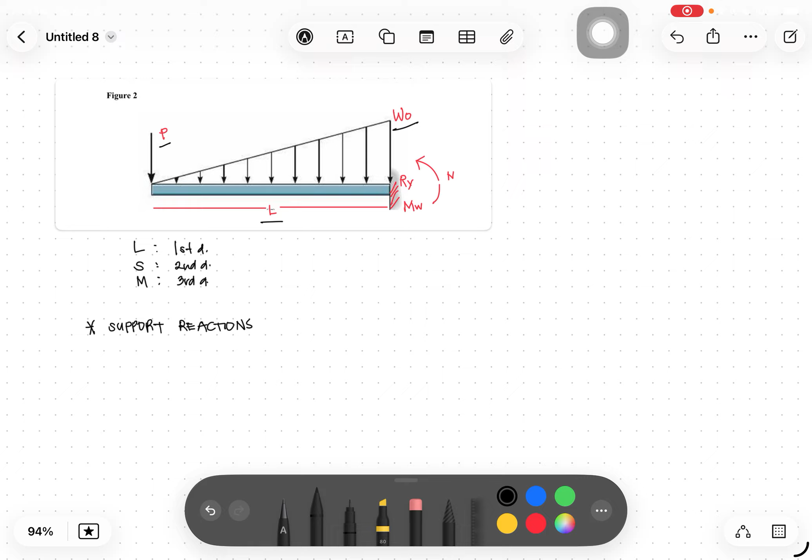And to solve for our reactions, first step natin is our equilibrium. Para hindi gumalaw yung beam, ang wall reaction Ry must counteract all downward forces. So, ang total load ng triangle is just its area, or 1/2 base times height. So, Ry is simply P plus 1/2 WO times L, or its length.

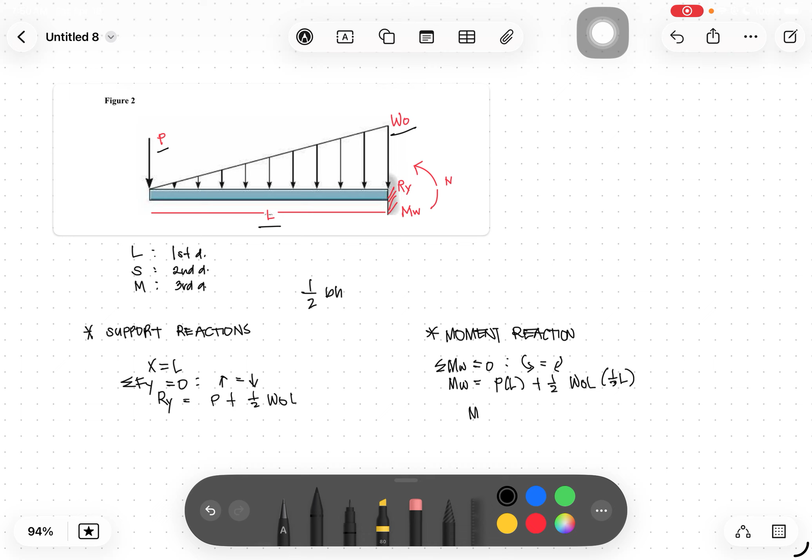Now, for the moment of reaction naman, kung makikita natin, yung point load P has a lever arm of L. And the triangular load resultant acts at the centroid, which is 1/3 of the length from the big end. So, our wall moment, isulat muna natin. At yung 1/3 ng length, kaya ang makukuha nating wall moment is point load times L plus yung triangular load length squared over 6.

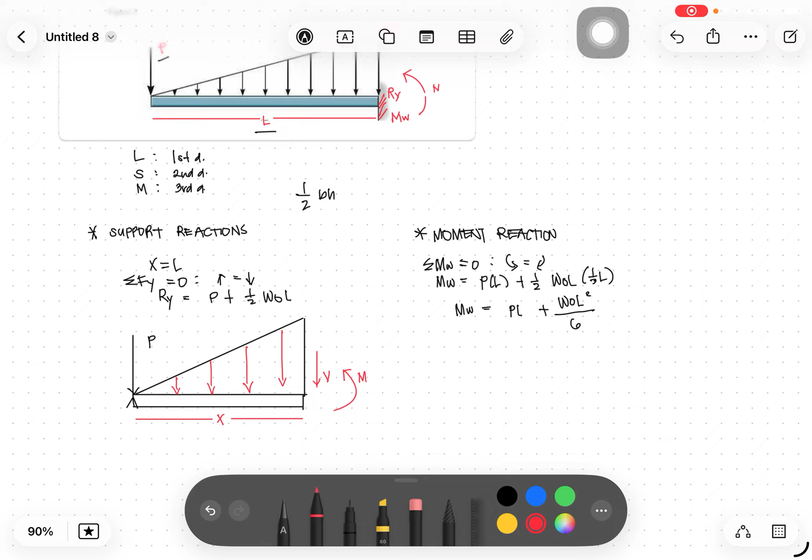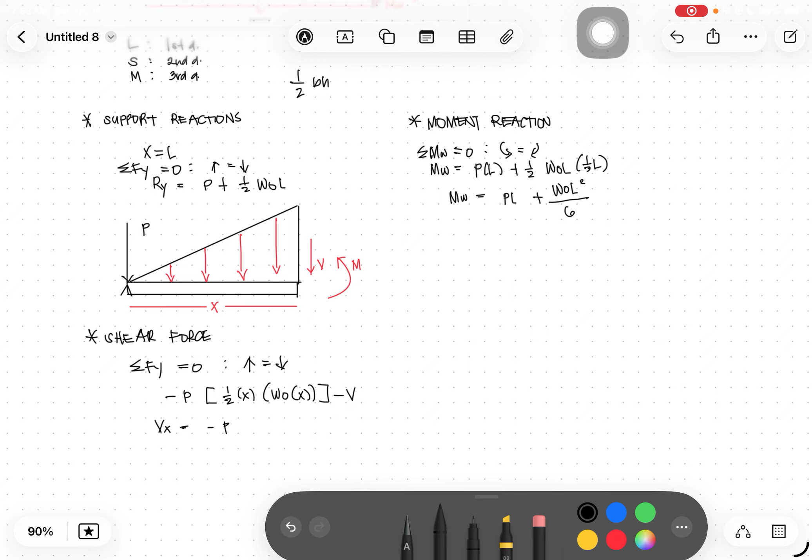So, Fy equals 0, downward. As we can see, we have negative P, and the area of this small triangle, 1/2 times x, quantity of triangular load times x, minus V. And that gives us Vx equals negative P minus our triangular load x squared over 2L. Now, look at the x squared. As we can see, it confirms our parabolic shape. Di po ba?

Next naman, ang hahanapin naman natin ay ang ating moment, or our Mx. At para makuha ito, we multiply these forces by their distance from the cut. So, M plus Px. P is x distance away, and yung triangular portion is x over 3 away from the cut. So, plus, quantity of 1/2 times x, triangular load x over L, and yung triangular portion, x third.

Kaya ang ating equation ay Mx is equals to negative Px minus triangular load x cubed over 6L. Since it's x cubed, this is a cubic curve. So, nakikita na natin unti-unti yung relationships between the load, the shear, and the moment.

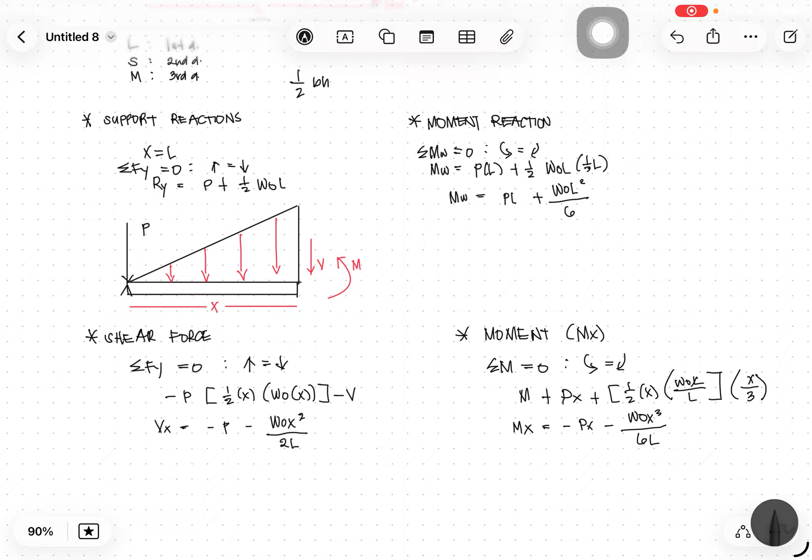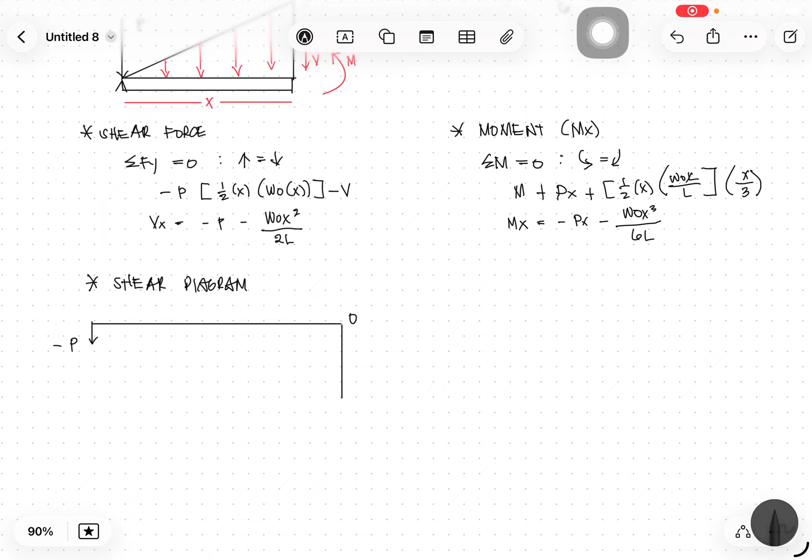So, let's visualize this. For the shear diagram, start at 0. Ito yung ating P. Ito yung 0. The point load P pushes us down immediately to negative P. From there, yung triangular pushes pababa in a curve, hindi straight line. So, this is a concave down parabola. Kaya magiging ganito ang shape niya.

Ayan. And by the time we reach the wall, makukuha natin ay negative PL plus triangular load times length squared over 6. At ito na naman ay ganito.

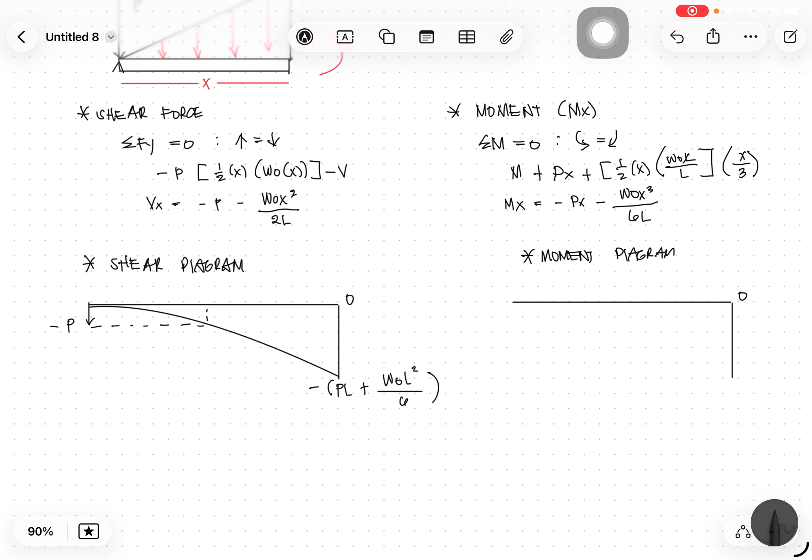Next, for the moment diagram naman, we start at 0 also kasi free end. Ganito din. The moment becomes increasingly negative as we move toward the wall. Kasi yung x cubed term, the curve drops very steeply. Kaya yung support ay, sorry.

Nagkabaligtad pala. Ang makukuha pala natin dito as we reach the wall is P plus 1/2 triangular load times length. At dito pala natin makukuha yung negative PL plus 1/6 WL squared, or PL plus WL squared over 6. At ang kanyang magiging diagram ay ganito din.

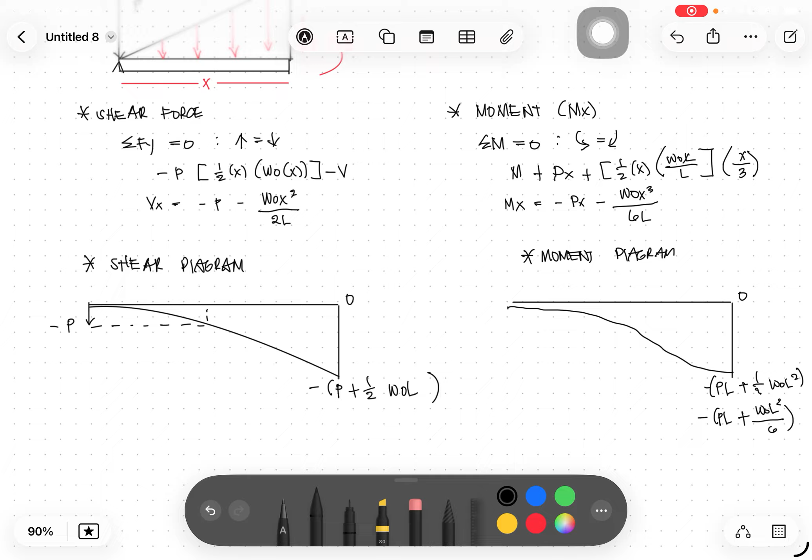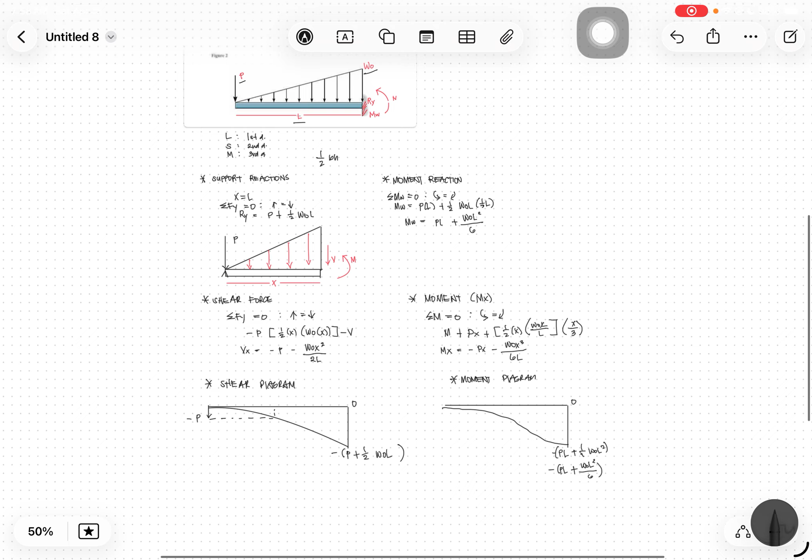So, in summary, this figure 2 shows yung different load types na nag-interact sa isa't isa. The point load creates an initial jump in shear, habang yung triangular load naman, siya yung nag-create ng curve transitions. Palagi nating tatandaan the degree ng curve: 0 for point, 1 for linear, 2 for parabolic, and 3 for cubic. And so, this completes our analysis for figure 2.